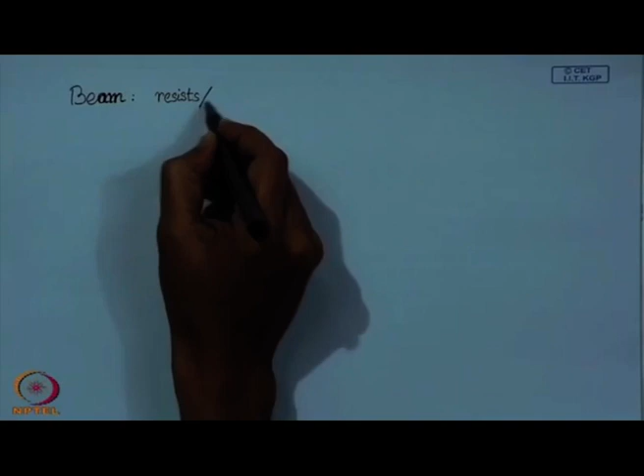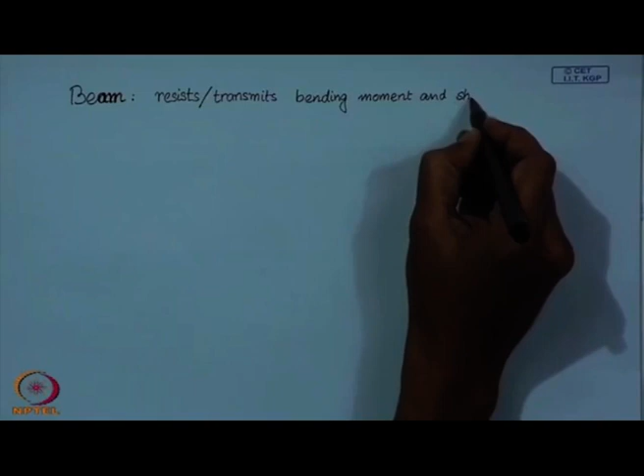Now, a beam is a one dimensional elastic continuum which can resist or transmit bending moment and shear. So, a beam can resist or transmit bending moment and shear, and it is a one dimensional elastic continuum.

So, this is distinctly different from the definition of a string, which cannot resist bending. And such examples we have seen in our previous lectures.

Now, when we mathematically model beams, we must make certain assumptions, because first of all we are considering it to be a one dimensional elastic continuum, and we are also saying that it can resist bending moment. So, in order to take care of these various things, we have some simplifying assumptions in our mathematical model. Let us see what these assumptions are.

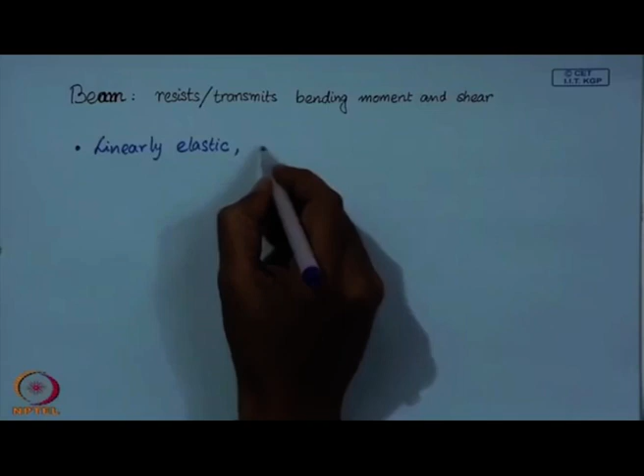The first assumption that we make is about the material: we will restrict ourselves to linear elastic material, which is of course also homogeneous and isotropic.

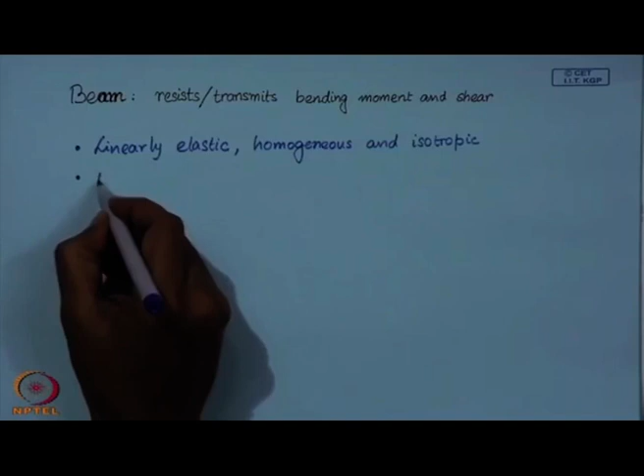The second assumption that we make is that the beam is slender. So, in today's lecture, this will be an important assumption.

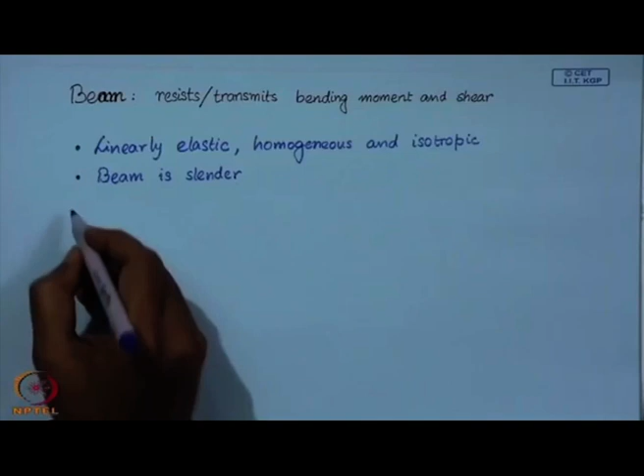Under this assumption, there is this well known Euler-Bernoulli hypothesis. This Euler-Bernoulli hypothesis holds. So what this tells us is, suppose I have a beam.

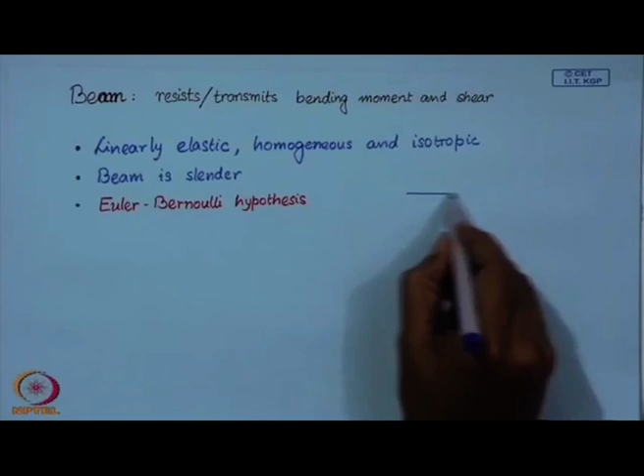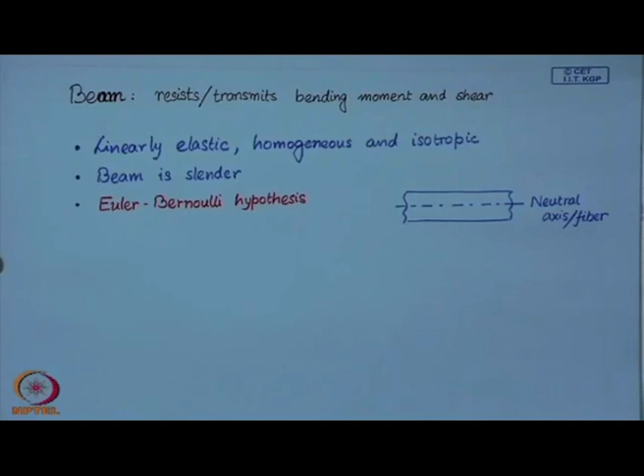So, this is a section of a beam, and there is something called a neutral axis, or neutral fiber. When this beam deflects, it takes up a shape something like this.

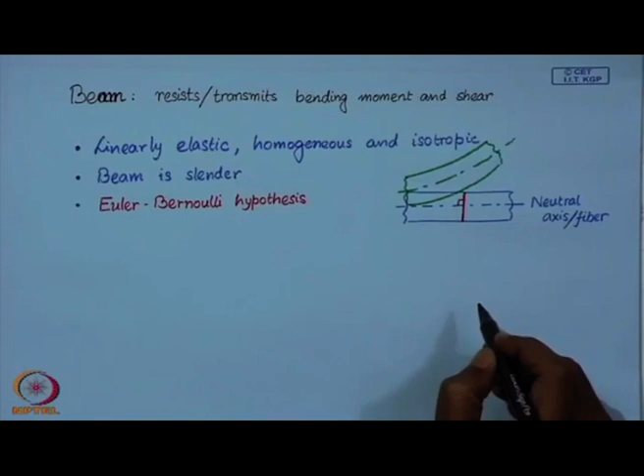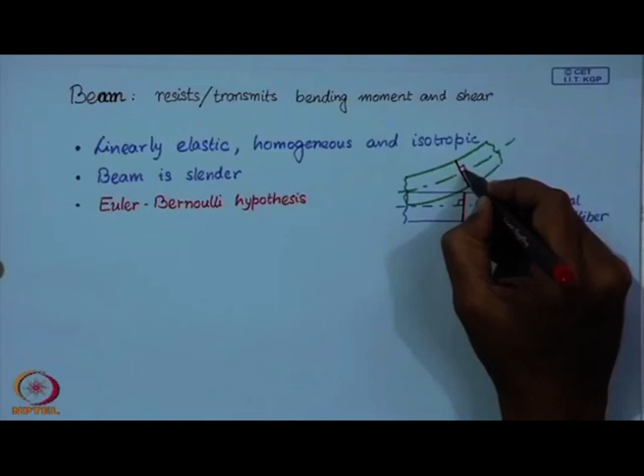So, if you take a plane section of this beam before deflection, which is perpendicular to this neutral fiber or neutral axis, then in the deformed configuration this section remains plane and remains perpendicular to the deformed neutral axis. So, this is the Euler-Bernoulli hypothesis.

Then we make the final assumption in the model that we are going to discuss today, that shear is negligible, or another way of saying this is that the beam is infinitely stiff in shear.

So, we will assume that the shear strain in the beam is negligible, and another way of saying this is that it is infinitely stiff in shear.

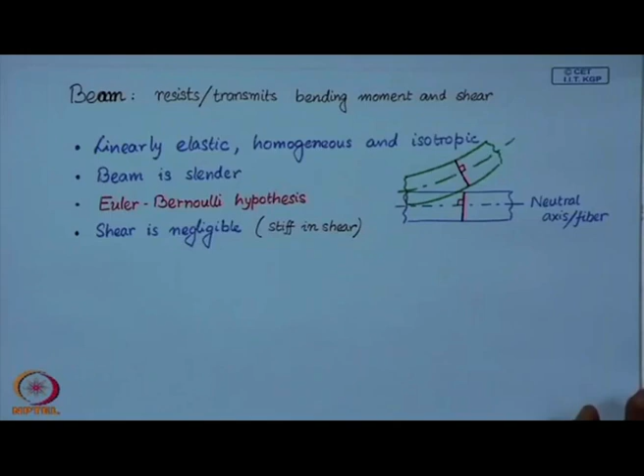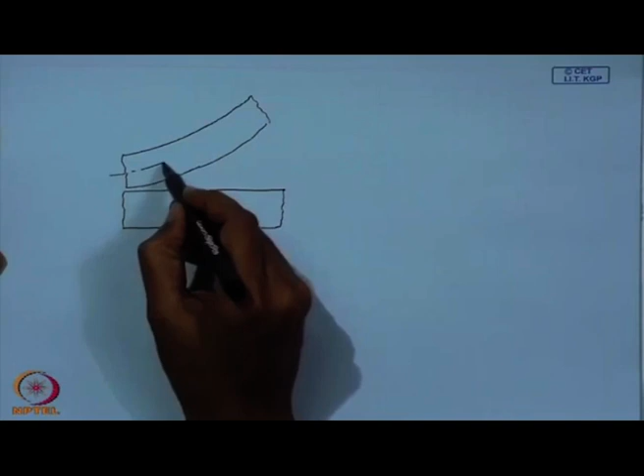So, now with these assumptions, let us get down to modeling of the beam. So, once again let me draw this section of the beam.

So, this is our neutral axis or neutral fiber. Now, this is neutral, which means it is unstrained, it remains unstrained. So, this axis in the undeformed configuration and in the deformed configuration remains unstrained.

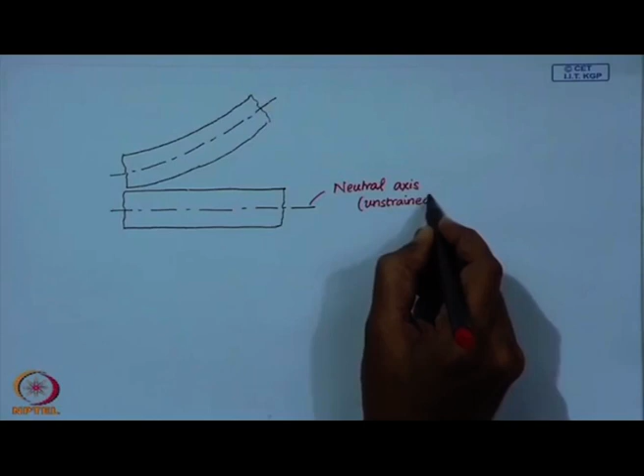So, once again let us consider this element, which upon deformation... so this is an element which undergoes deformation.

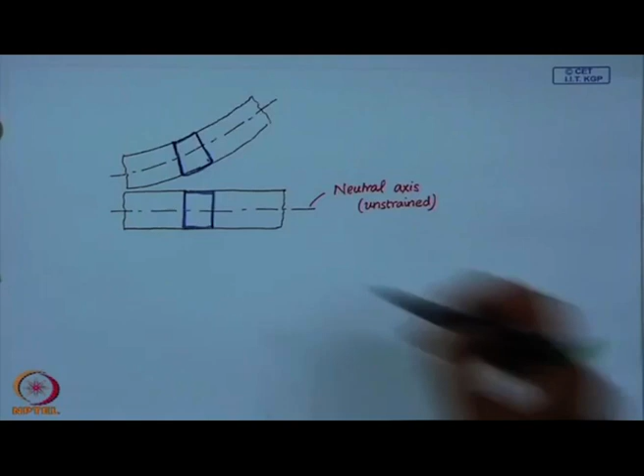Let the depth of this beam, or height of the beam, be denoted by h, and once this beam deforms, let us assume that the radius of curvature at this point is given by...

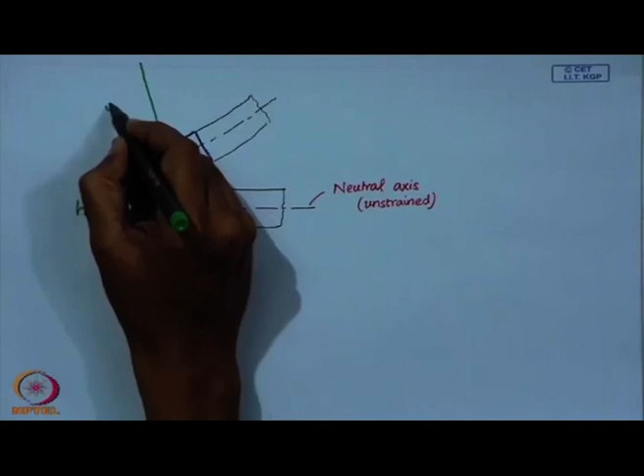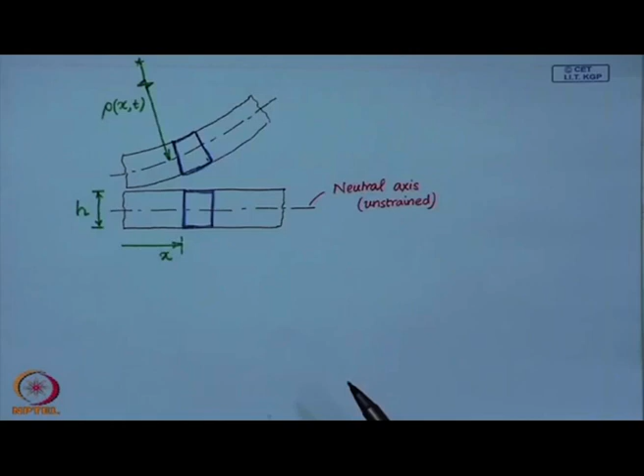...at time t. So, the radius of curvature at x at time t is rho of x and t.

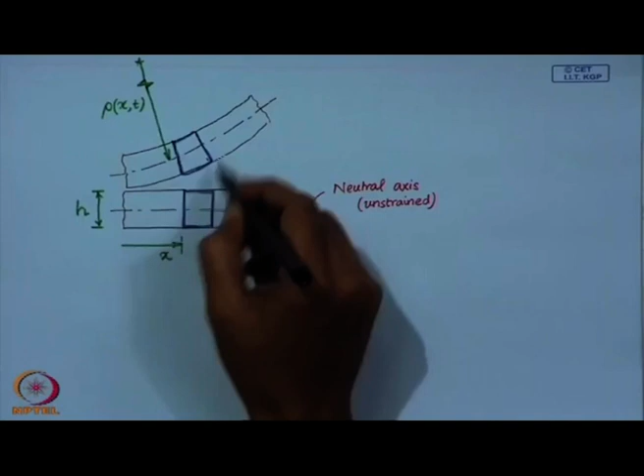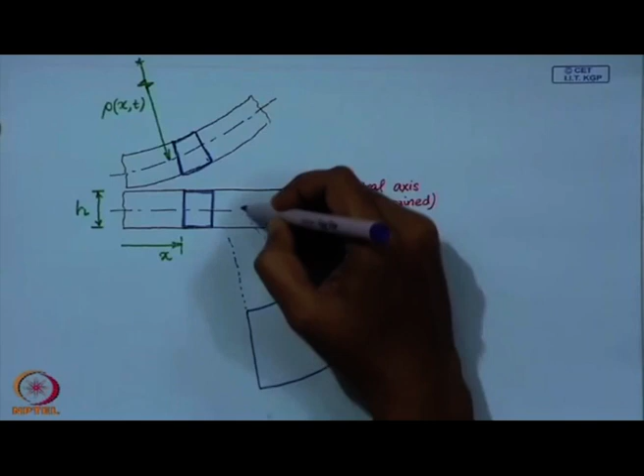Now, let us look at this element, let us draw the free body diagram of this element. So, let this element be of angle d theta, and this plane.

So, this is an exaggerated figure. So, this angle is theta and the angular length is d theta.

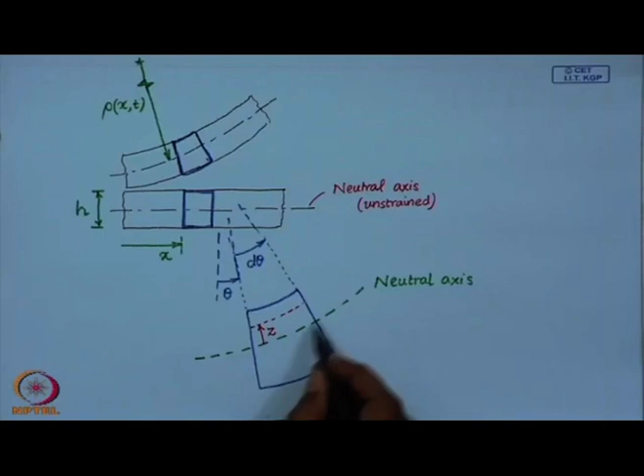Now, let this be the neutral axis, then at a distance z measured from the neutral axis or the neutral fiber, let us look at another fiber. So, we can write...

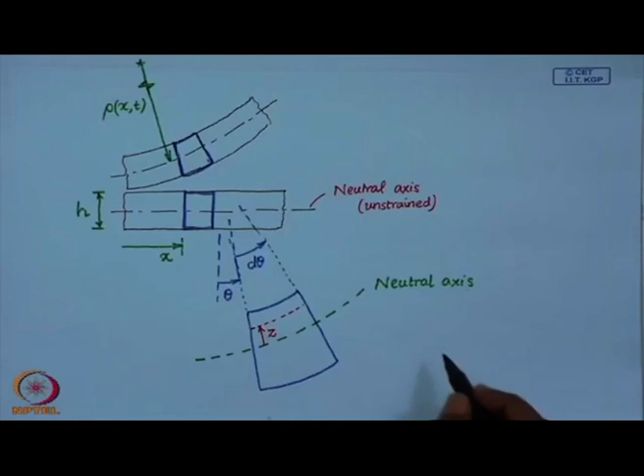First we are going to find out the strain in these fibers of the beam. As I mentioned, this neutral axis is unstrained. So, let us look at another fiber which is at a height z from the neutral axis or the neutral fiber. Then I can write the strain as... so first I have to write the length of this fiber.

Now, this radius of curvature is rho. So, the length of this fiber can be written as: the deformed length of this fiber is rho minus z, times d theta. So, that is the length of this fiber.

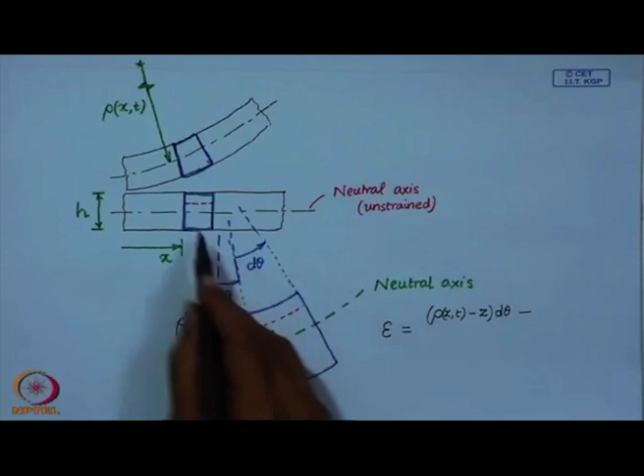Its undeformed length before deformation, as you can see, is the same as rho times d theta. So, since this length remains unchanged, this in the undeformed configuration was of the same length as this.

So, its initial length was rho times d theta, and the initial length... so, therefore, this turns out to be 1 over rho, 1 over the radius of curvature.

This is known as the curvature, and the expression of curvature in terms of the equation of this neutral fiber. So, if you represent this equation of the neutral fiber in terms of the deflection of this neutral fiber from the undeformed neutral fiber.

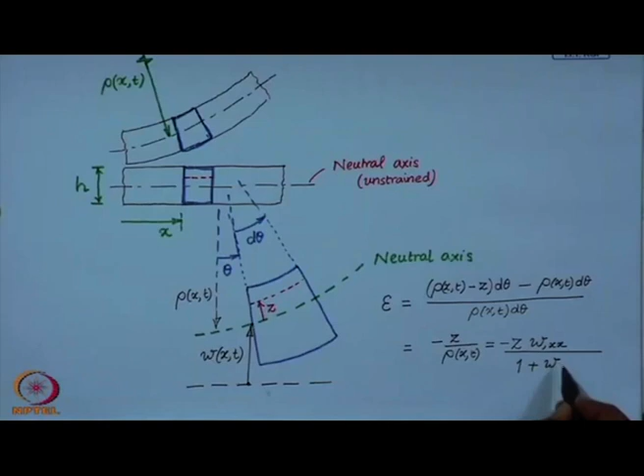So, w x comma t is the displacement of this point from the undeformed configuration. The equation of this curve is given by w x comma t at any time t. In terms of the equation of this curve, the curvature can be written as the double derivative with respect to x of w, divided by 1 plus del w del x whole square, raised to power 3 over 2.

Now, we will consider in these derivations that the slope of the beam is small. Under that assumption we can drop higher powers of the displacement variable w, or the derivatives of the displacement variable or the field variable.

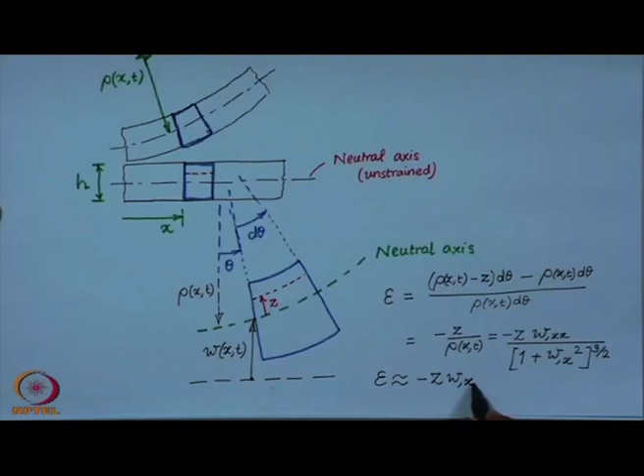We can drop the higher order terms and write the strain in this fiber as minus z times the second derivative with respect to x of w. So, w is our field variable.

So, this is under the assumption that the slope of the beam at any location is much smaller than 1. Under this assumption our strain simplifies to this expression.

So, this is the strain in this fiber at a height z measured from the neutral axis, and thus we have the strain in terms of the deflection of the neutral axis, which is what we are going to track when we represent the deflection of the beam. So, the deflection of the beam will be represented in terms of the deflection of its neutral axis.

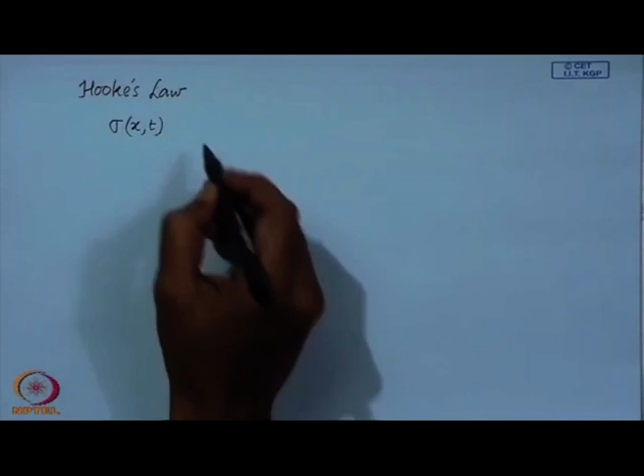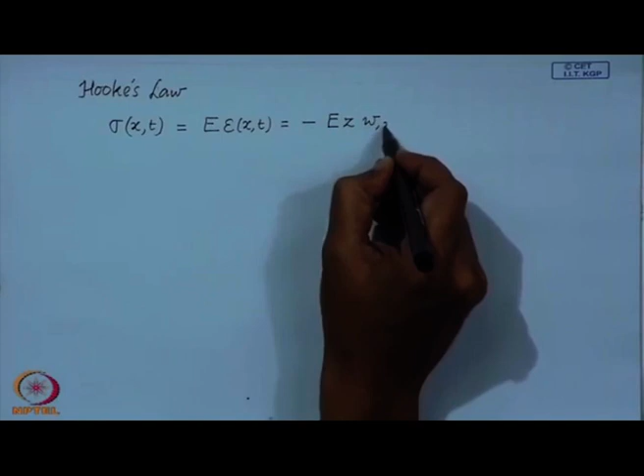So, once we have this expression of strain, we can bring in the constitutive relation using Hooke's law, and we can write the stress in that fiber at a location x at time t. So, this is the axial stress, or stress in the axial fibers of the beam, at a location z measured from the neutral axis.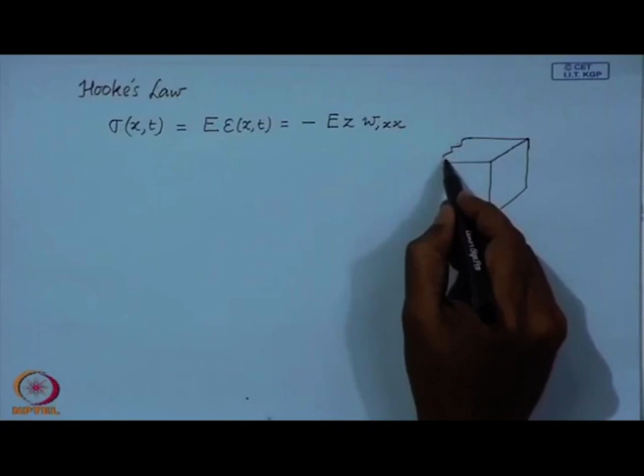Now, we have this stress, as you can see here, is linear in z. So, let us consider a cross section of this beam.

So, this is the neutral fiber plane, and if you represent the stress, then... so if z is positive, we are measuring z from the neutral axis positive upwards.

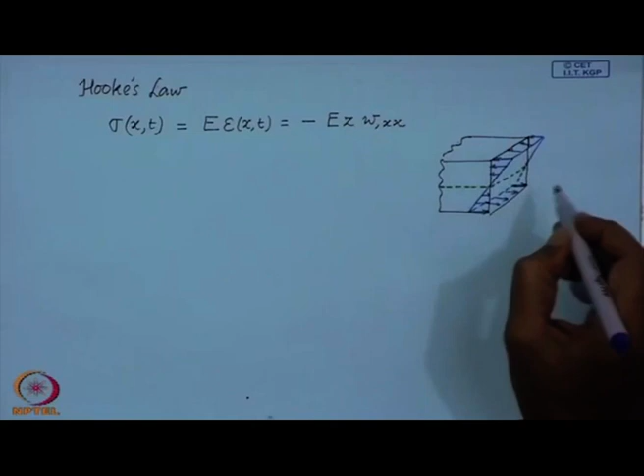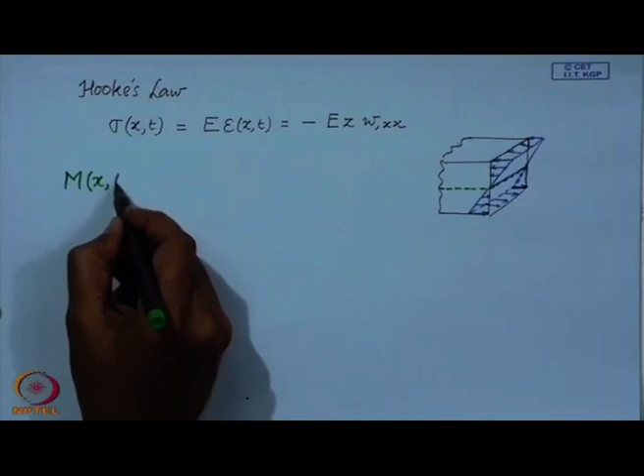So, now what we want to find out is the moment that comes because of this stress distribution on the cross section of the beam. So, moment at any location x at any time t will be given by.

So, if dA is a little elemental area on this cross section, then the force acting on this area is given by sigma times dA, and the moment about the neutral axis, because of this stress distribution, is given by this arm, z, cross this force.

And if you do that calculation, that turns out to be negative of... and this has to be integrated over the total area A. So, if you now substitute these expressions, this negative and this negative turns out to be positive.

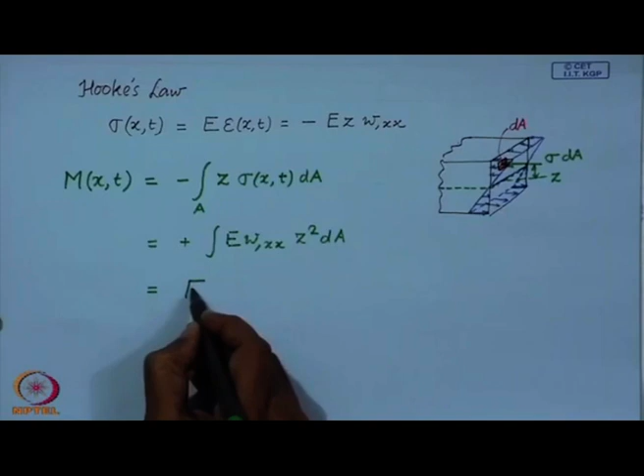Now, Young's modulus and the curvature, the approximate curvature, does not depend on this area integral, so that can come outside. And what we have here is, where I, this is known as the second moment of the area, about the neutral axis.

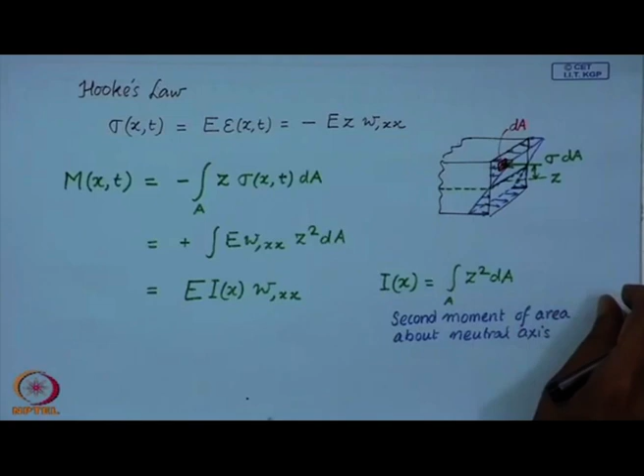So, this is the moment that is acting on this cross section. Now, let us once again look at the free body diagram of this little element of the beam.

And introduce the interaction forces. So, we have the shear forces at these faces and the bending moments.

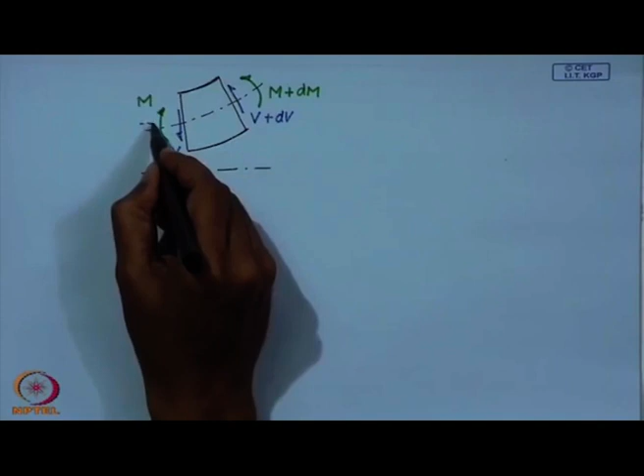So, the sign convention we follow: this is the positive shear force and bending moment, and this is the undeformed neutral axis. So, this deflection is w x comma t.

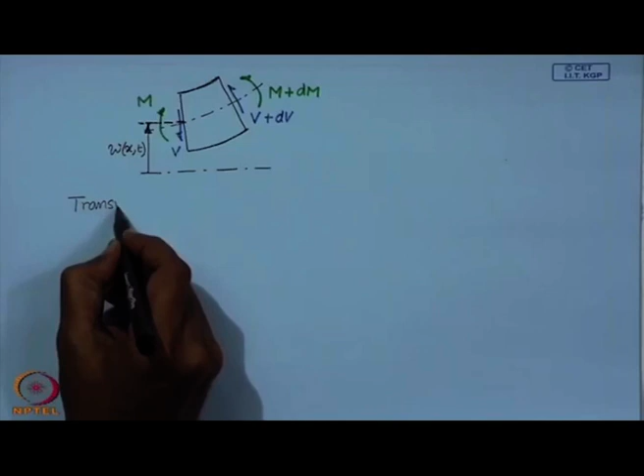Now, let me write down the transverse dynamics, the equations of transverse dynamics of this little element whose free body diagram I have drawn. Now, so from Newton's second law, if rho is the density of the material and if A is the cross sectional area at this location x.

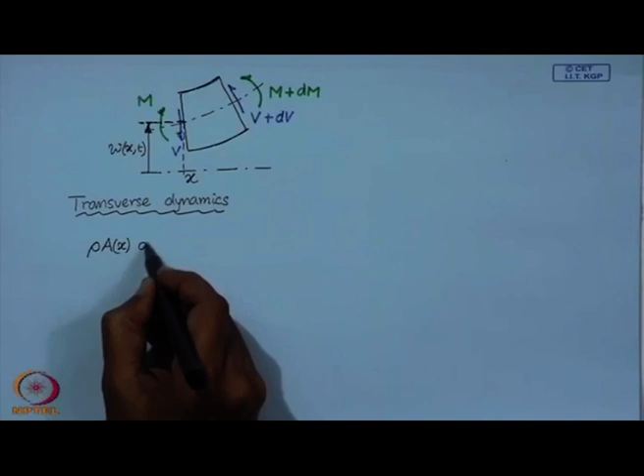Then rho times A is the mass per unit length, into dx, which is the length of this element. Then this is the mass of this little element times its transverse acceleration must be equal to.

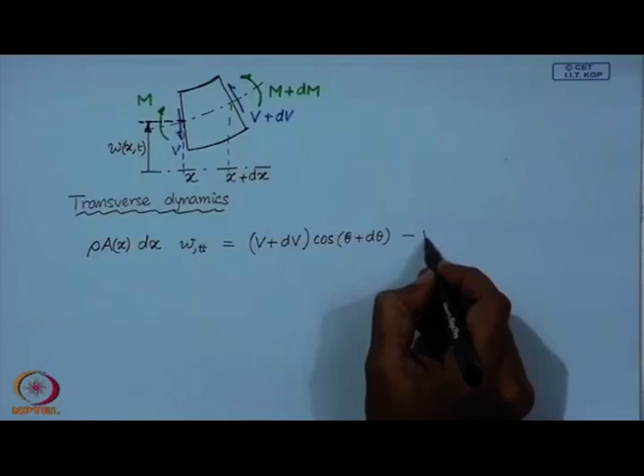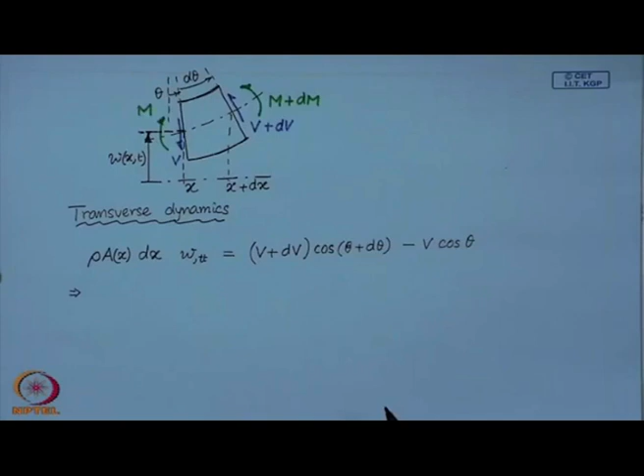So, I can write, where what I have indicated before: this angle is d theta and this angle is theta. So, I have taken the projection of these forces in the transverse direction, and if you divide by dx and consider that cos theta is approximately equal to 1, then this is the equation of transverse dynamics for the beam element.

Now, along with the transverse dynamics, I will also write the rotational dynamics.

If rho is the density of the material and I is the second moment of the area about the neutral axis, then rho times I gives us the moment of inertia of this element about this axis, which is perpendicular to the plane of this paper. This is per unit length, moment of inertia per unit length, so times dx will give us the moment of inertia of this element times the angular acceleration.

This angular acceleration can be written as the double time derivative of this angle theta of the element, and this must be equal to the sum of all moments about the center of mass of the element. We are writing this rotational dynamics about the center of mass. So that turns out to be...

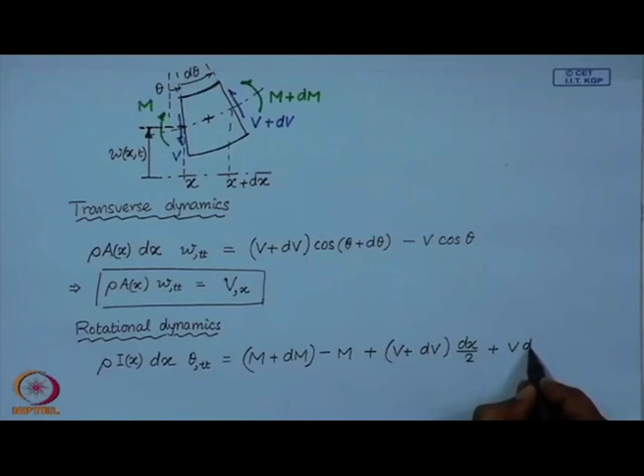So this implies, upon dividing throughout by dx, now...

This theta has to be somehow represented in terms of w. Now, we know that tan of theta for small slopes is almost equal to sine of theta, which is almost equal to theta, and tan theta is nothing but the slope of the beam. So therefore, theta is approximately the slope of the beam. Therefore, from here I can rewrite this equation as...

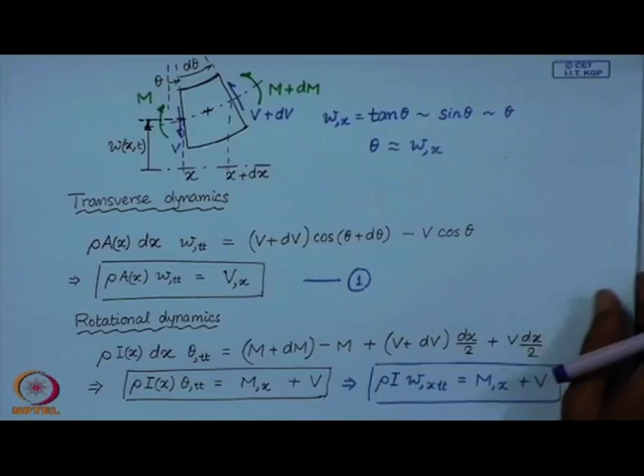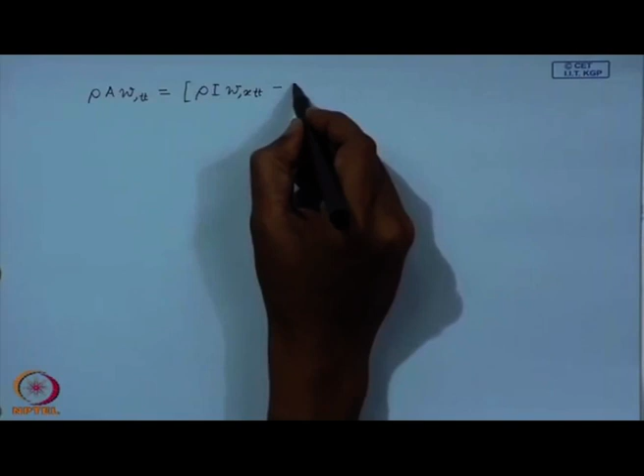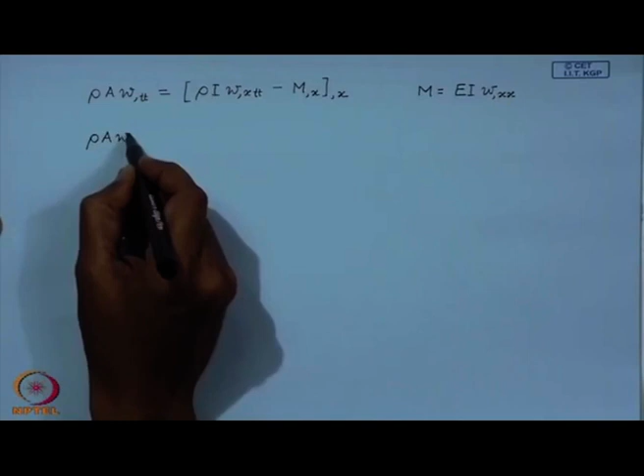And if we do that, so this was del V del x. So this is... and the bending moment, we have determined this. So therefore, finally, if I rearrange this equation...

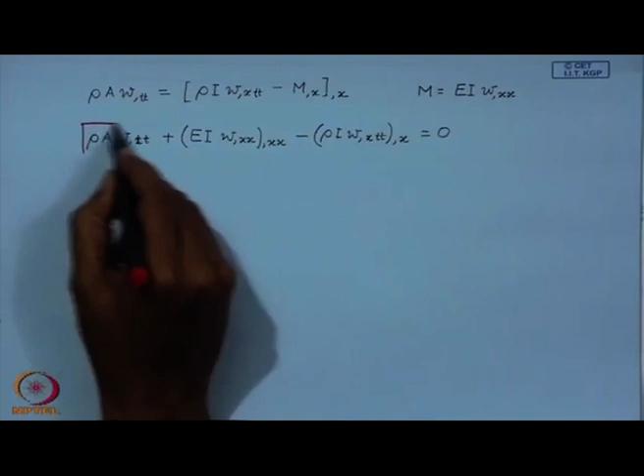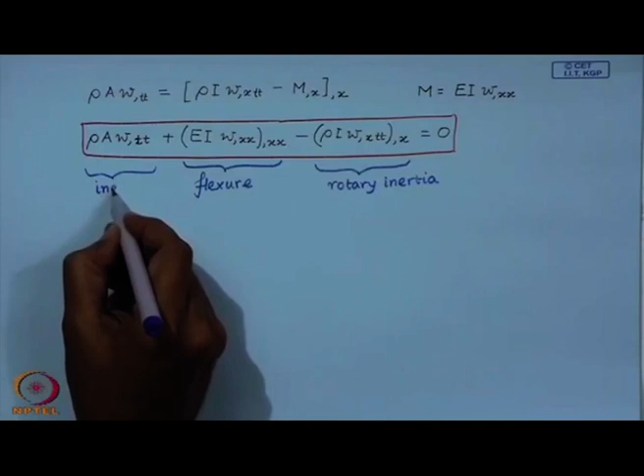So this is finally our equation of motion of the beam. Now here, this term is known as the flexure term, this term is the rotary inertia term, and this is the normal transverse inertia term, the translational inertia term.

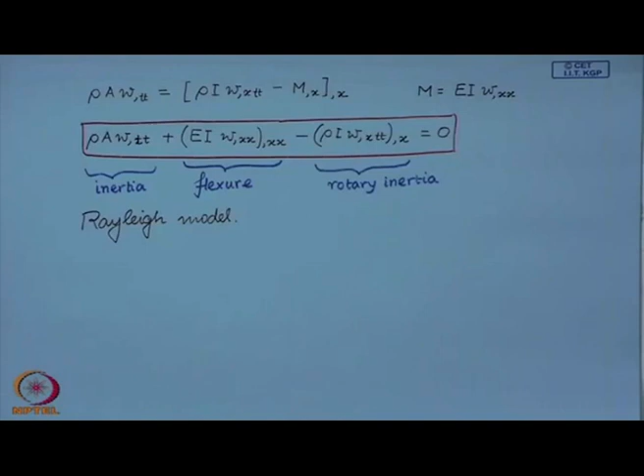So this model of the beam is known as the Rayleigh model of the beam, or Rayleigh beam model. So in the Rayleigh beam model we have the inertia term, the flexure term, and the rotary inertia of the element. For very slender beams, this term can be neglected, and in that case...

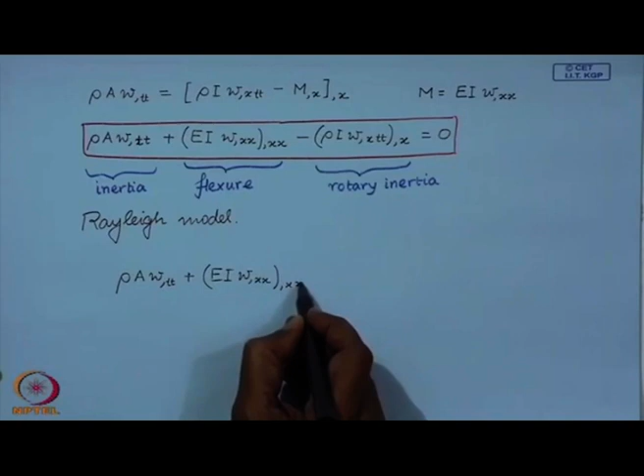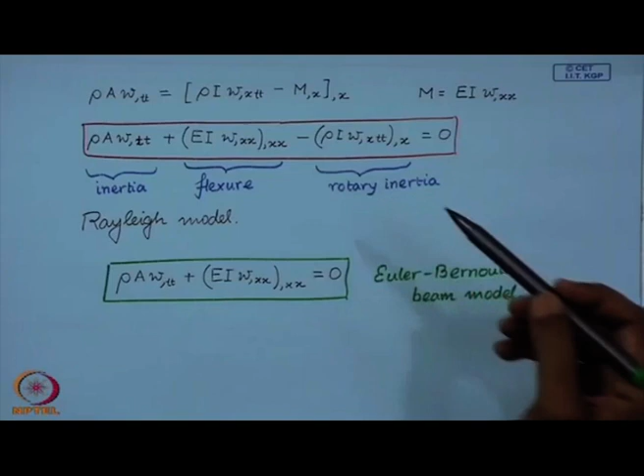This is known as the Euler-Bernoulli beam model. So the Euler-Bernoulli beam model does not have this rotary inertia which is present in the Rayleigh beam model. Now, when you have forcing, then instead of this zero on the right hand side, you have the force distribution. So these are two very simple models for beams.

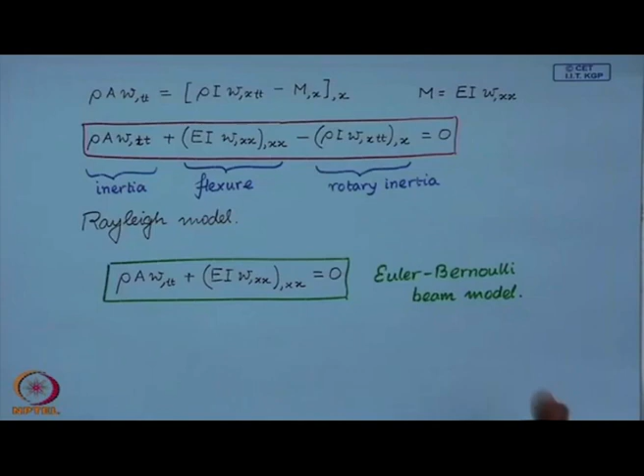Next, we are going to discuss the variational formulation for beam dynamics. As we have seen before, this variational formulation gives us a very powerful alternative way of deriving the equations, and not only that, we also get the boundary conditions, which we have not talked about as yet, the possible boundary conditions for the problem. This variational formulation also leads us to some very powerful techniques for approximately solving or discretizing the equations of motion, as we have seen in our previous lectures.

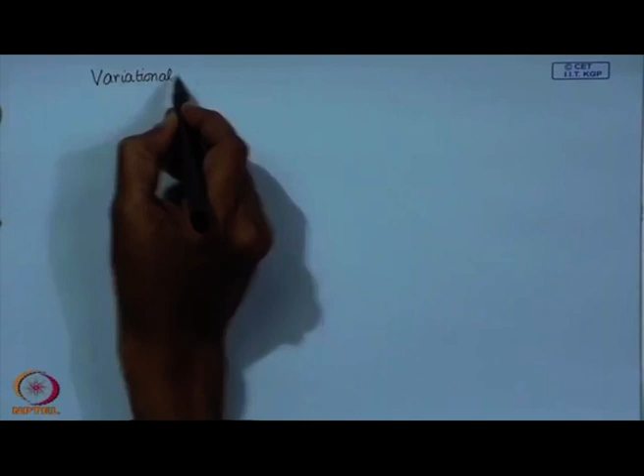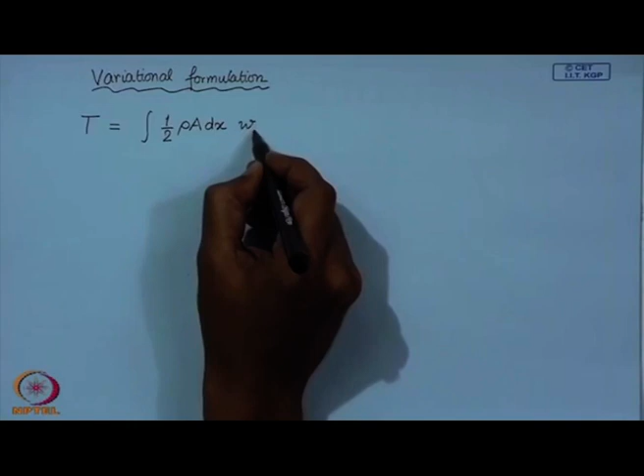So let us discuss the variational formulation for the beam model. Now, the first thing that we do in this variational formulation is write down the kinetic and potential energy expressions. So the kinetic energy of the beam can be written as the translational kinetic energy, so rho A is the mass per unit length, and into dx will give us the mass of a little element times the velocity square.

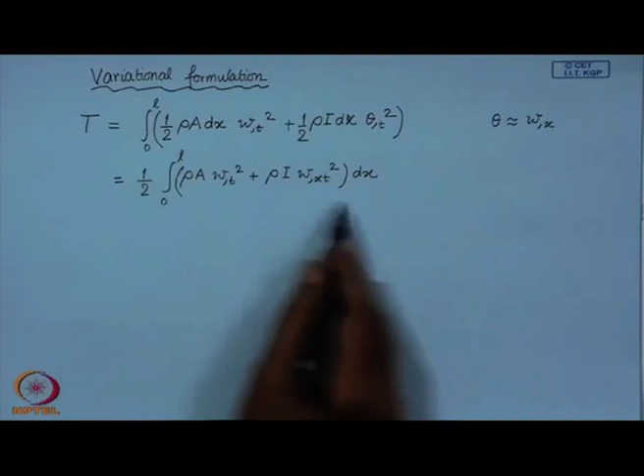Now the potential energy of the beam can be written. We know that the potential energy per unit volume for a linearly elastic material is given as half the stress times the strain, so over the volume. dA is the small area of the cross section and dx is the small length of the element. So if we integrate this over the area and over the length, then we should have the potential energy.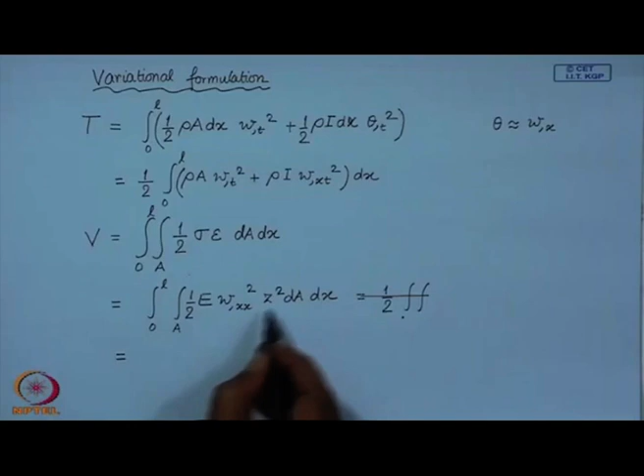Now if you insert the expressions of stress and strain in this expression, then this is what you are going to get, and therefore there is of course this one half. So this Young's modulus and the curvature square, this will have nothing to do with this area integral, so they can come out, and what we have is z square dA integrated over the area, and that we already know.

Is the second moment of the area about the neutral axis of the beam.

So, these are the expressions of the kinetic and potential energies. Now, when we derive the

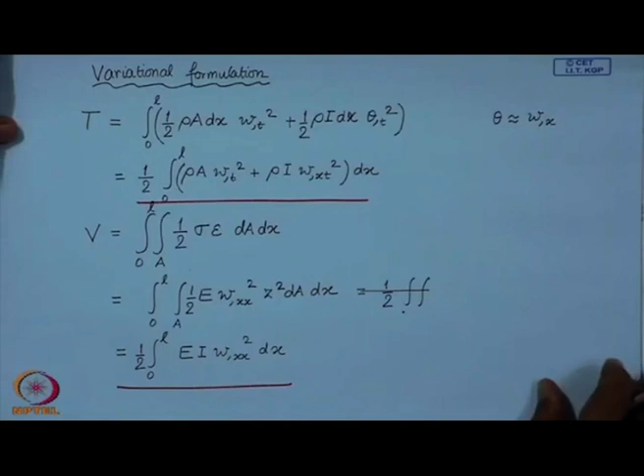equation of motion using the Hamilton's principle, we write it like this mathematically. So, this turns out to be

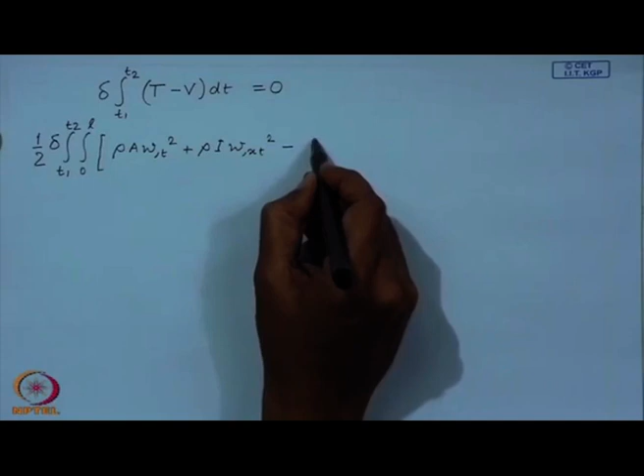So, this is the statement of Hamilton's principle. So, when you take the variations,

Now we will integrate by parts this term with respect to time, this time once with respect to space and once with respect to time, and this term twice with respect to space. So, if you do that and rearrange, then what you are going to

obtain. So, when we integrate by parts with respect to time this term. So,

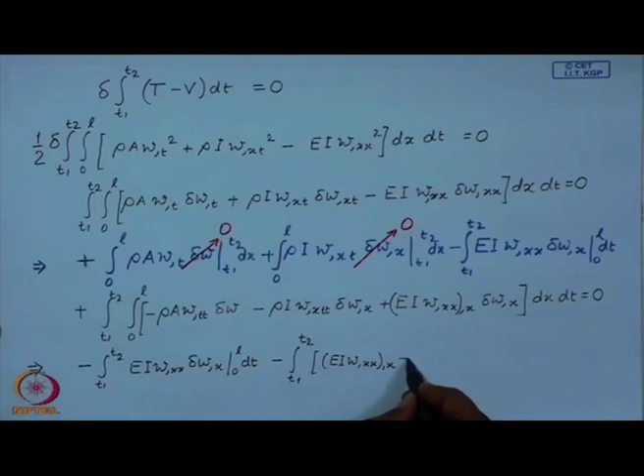so these are the boundary terms, and so this is what we are going to get.

Now, we invoke our statement of the variational formulation, which says that the boundary variations and the variation over the domain, if this whole thing has to vanish, then these two must vanish individually.

So, the integrand must vanish for arbitrary variations over the domain, and that, as you can see, will give us the equation of motion.

So, this integrand is going to give us the equation of motion, what we have derived before. Now, look at the boundary terms. So, equation of motion we have already written, let us concentrate on the boundary terms.

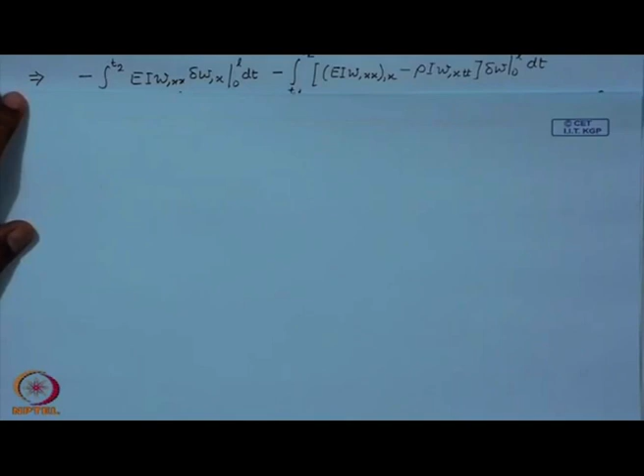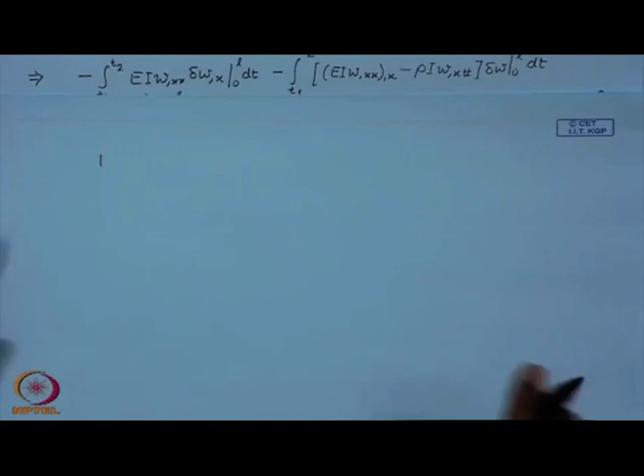So, here we can have, so these are the boundary terms. So, we can have this at 0 to be 0, or we can have the slope at 0 to be 0

or fixed. Then at L again or, and these two are connected by an and. So, you can have this and this, or this and this, or this and this.

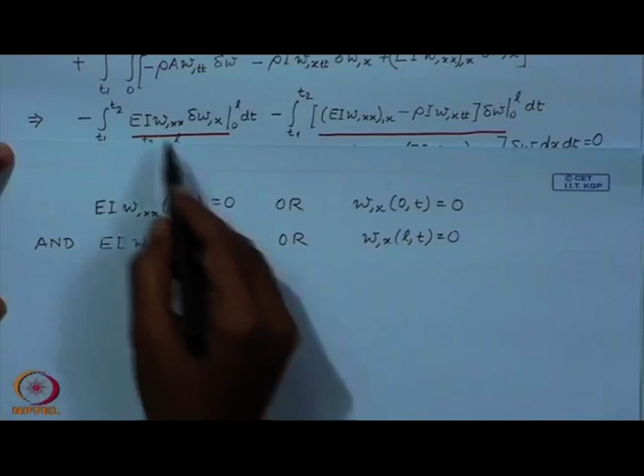So, combinations. So, this is from the first boundary term, from the second boundary term, which must again be connected with an and, or so here we have this displacement and

so these are the possible boundary conditions. So, this, as we can recognize, is the bending moment is 0, or the conjugate of the bending moment is the angle, so the slope, that must be 0, or this is the shear force.

Now, this is an additional term because of rotary inertia. So, this must be 0, or the displacement, which is the conjugate of this. By conjugate I mean the product will give us energy or work. So, either force or its conjugate, which is displacement, is 0, either moment or its conjugate, the angular displacement, must be 0.

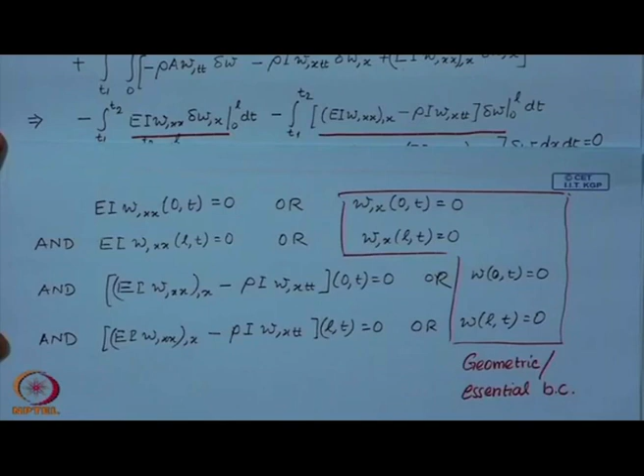and this set is known as the dynamic boundary conditions.

Now, let us quickly look at an example. So, we know that we have simply supported beam like this, so the boundary conditions here

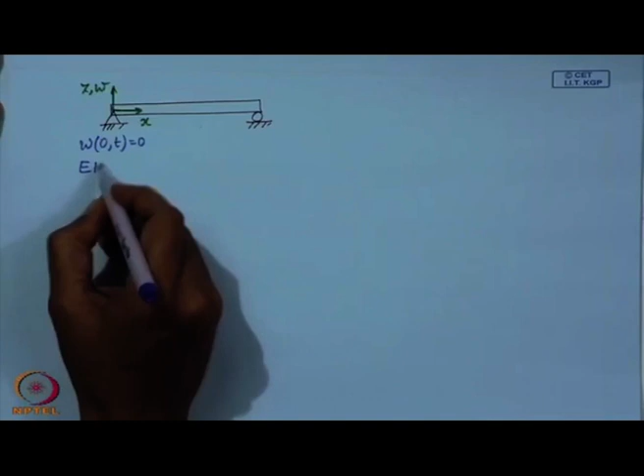and the bending moment, similarly here you again have the deflection to be 0, for a

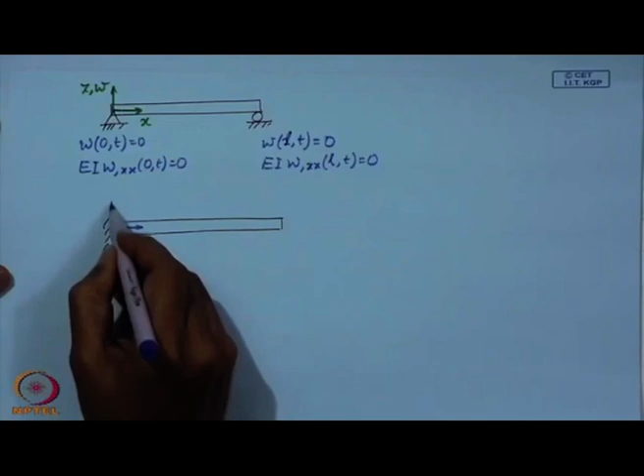cantilever beam, the boundary conditions here, deflection 0, and you know that slope is also 0. Here we have the shear force and the bending moment

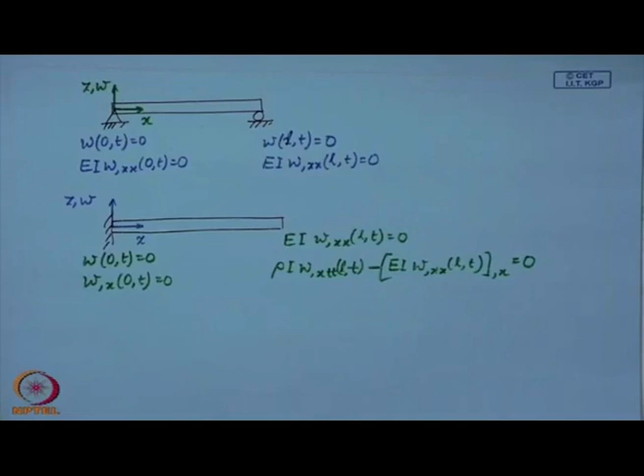to be 0. So, these are two examples that we have considered where we have written out the boundary conditions. There can be other examples, and we will discuss these in the subsequent lectures.

So, what we have discussed today, we have looked at some simple models of beam transverse dynamics of slender beams, and we have derived the equation of motion for the Rayleigh beam and the Euler-Bernoulli beam, and we have looked at the variational formulation from where we can also derive the equations of motion. So, we will continue this discussion in the next lecture.